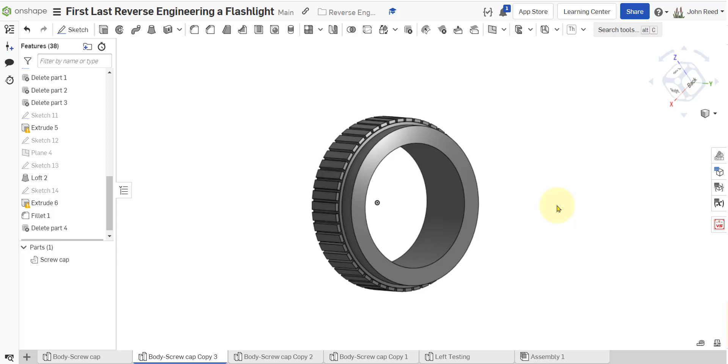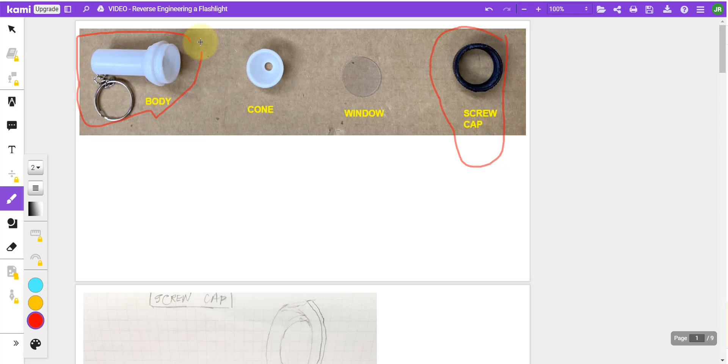Say we've made the screw cap of the flashlight here as I'm showing it, and it would be this part right here. Let's make the body, and the way we're going to do it is we're going to use the existing geometry here to make the body fit into it. Even though we do have some dimensions here, and we'd use these dimensions if we were making this in its own part studio, we're going to do it in a part studio that already has the screw cap. So let me show you what I mean.

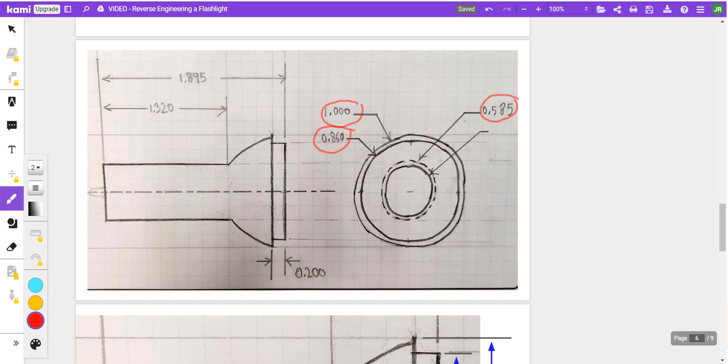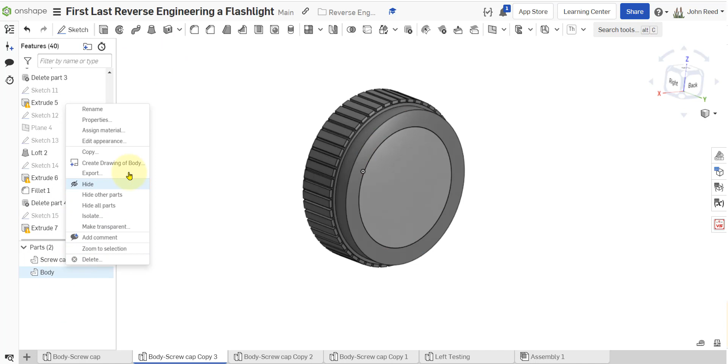So we're going to place a sketch here, and what we're building is this little chunk in here that's going to fit into the screw cap. Remember, we're using a friction fit instead of the screws. So what I'm going to do is simply extrude this thing the appropriate amount, which is 0.2. And I'm going to say new for a new part, and I got it. So I'm going to rename this body, and I'm going to change its color so I can distinguish it. So there it is.

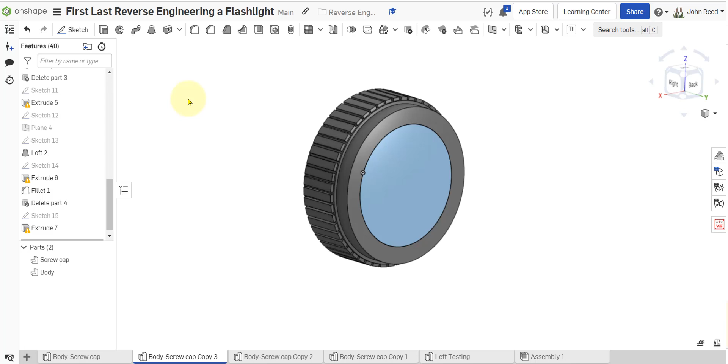Now I want to make the part that goes up a little bit and down here. So this part here, and I'm going to use the loft for this part. There's a trick to this. When you make the sketch here, you have to click this little disable imprinting. This will prevent all these lines from jumping onto your sketch and corrupting the loft command. So let me show you what I mean.

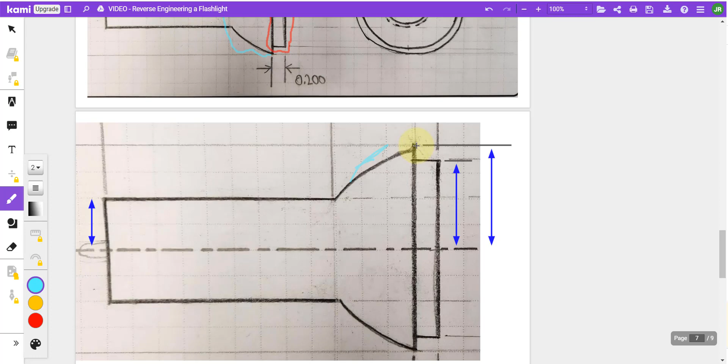So if I click on disable imprinting for this sketch and then place the sketch here, now I'm going to draw the circle representing the maximum distance. So this one right here, a radius 1.0. So I'm going to get a circle, and I'm going to turn off the screw cap, get a circle of radius 1 based on my drawings right there.

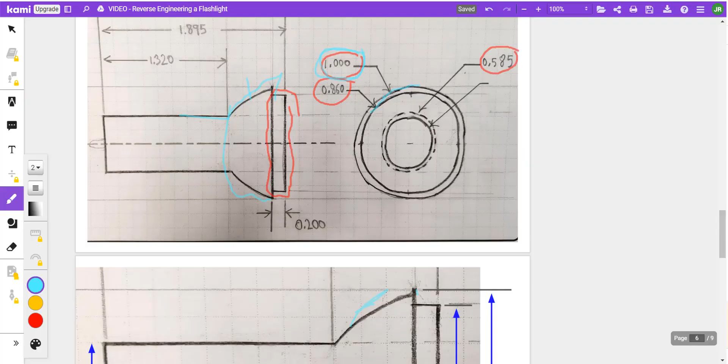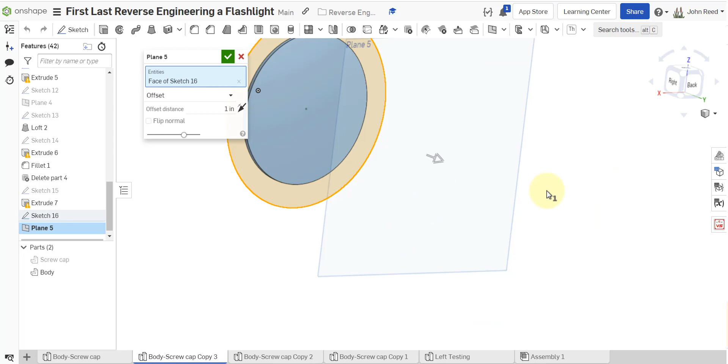And now I am going to make this circle right here, the one that's shown with the hidden line. So I'm going to make this part right here, which has a diameter of 0.585, and this distance here, I've done this so many times, is 0.375. Let me show you what I mean there. So once you've got this, I'm going to right click here, new offset plane. The default is 1 inch. I want 0.375. Accept that.

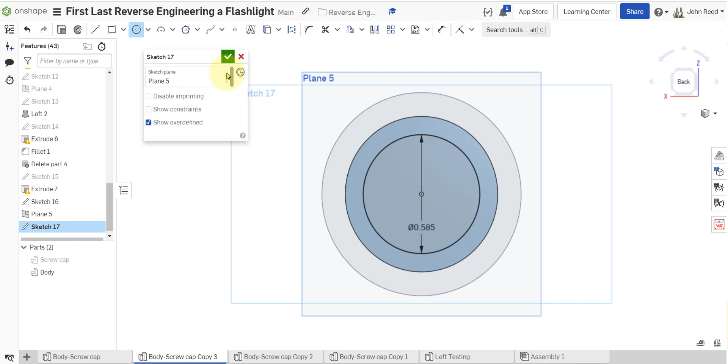Now I've got a plane that sits 0.375 away from my part there, and so I'm going to place a sketch on it. Press N, and now make the diameter of 0.585. And what I've got is this. Press P to turn everything on and then off. And I think I'm good there. And then I can loft from here.

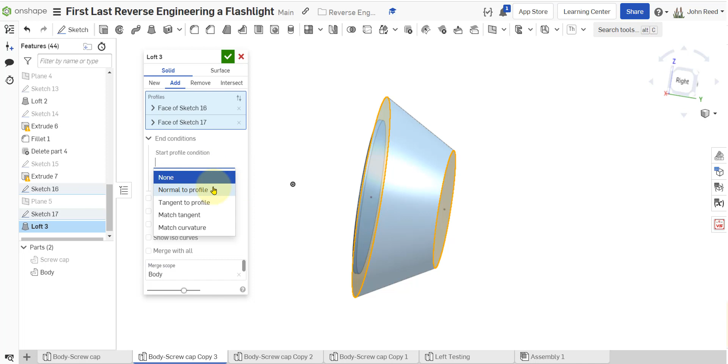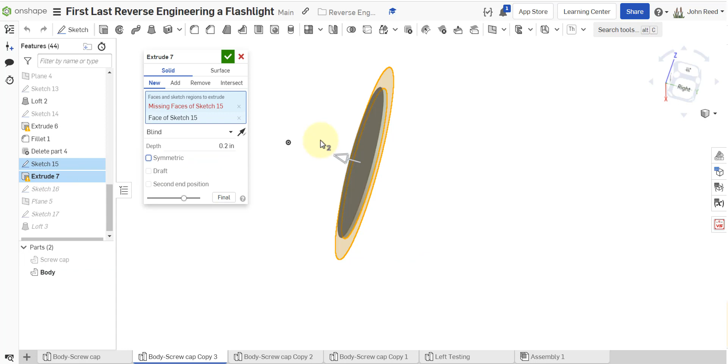Now notice these lines here aren't projected as well. If you don't click that disable imprinting, it will pick it up and corrupt the loft. So I get something like this, which is pretty close, but I think if we go normal at the beginning and then tangent at the end, it's a little closer to what we want, kind of. So there it is. And I'm a little concerned that this initial extrusion is not quite enough. Let me go back to that. I've got a lot of issues here because this is 0.2. I've been working on this cap for a while, so it's got a lot of history there.

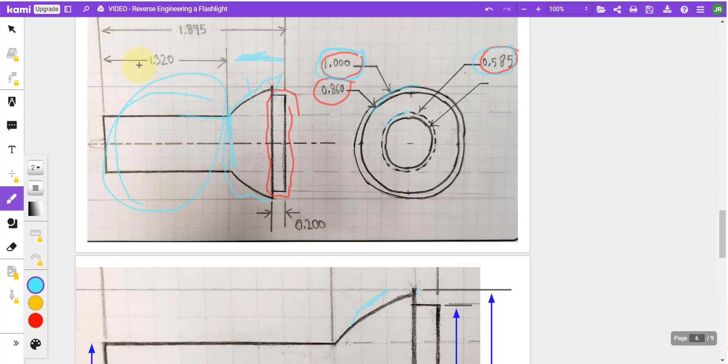That's better. Okay. Now I can place a sketch here, and again, I can just project this. Since I didn't select disable imprinting, I can just click here and have that come out, and of course that's this part here, and it's a distance of 1.32. So 1.32. I think that's right. So there it is, and then if I turn on the screw cap, there it is there.

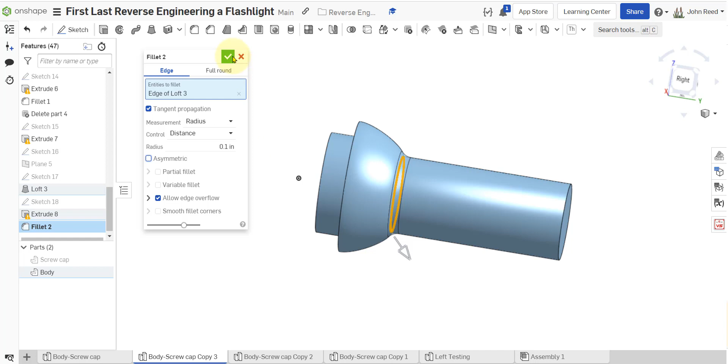And there are other things I can do. I can also maybe fillet this like that. Oh, that's probably too much. 0.1, like so, something like that. It's up to you. And then finally, I can shell. Let's go down to 0.040. I actually measured that once. If we do that, you can see it hollows it out.

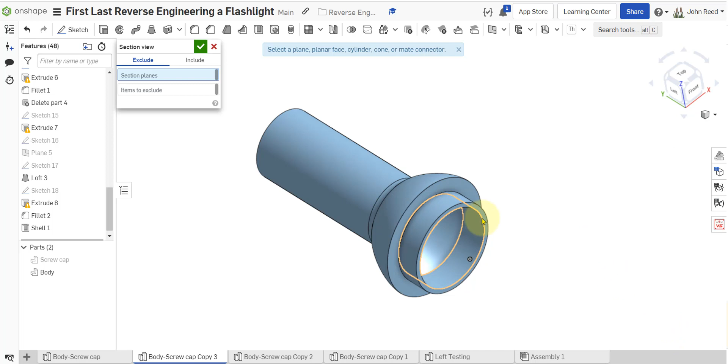And if we want to take a look at it a little better, we can come over here to the, let's see, I'm looking for section view. There it is. So click on a plane right there, and then I can drag this through here, and you can see that it shells it very nicely all the way through. And yeah, there's our body. Turn on the screw cap, and we've got it.